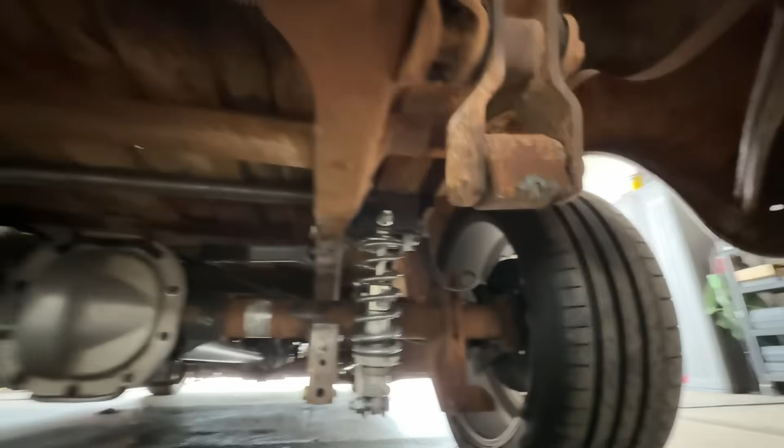Yeah, this thing's sweet. I had to mess with the fuel a bunch yesterday, with the base temp, just to get it on the trailer, because it wanted to lean out a bunch. It's running a lot better now. Needs a little fuel in her.

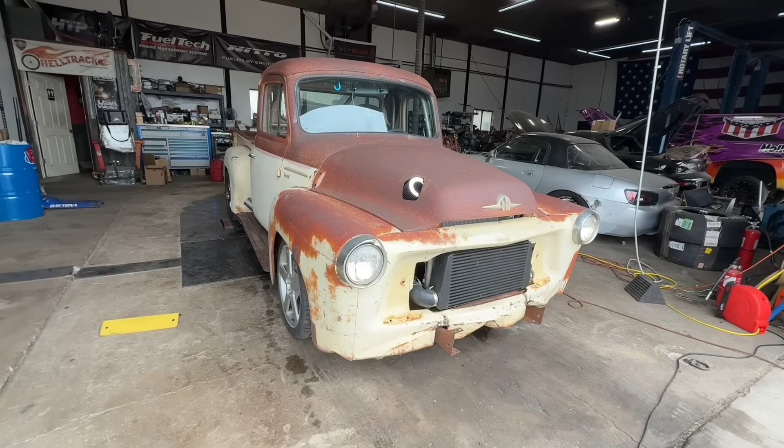That is sick. Still a little bit of work to do, but you're getting close. Yeah, it's just down to the handful of last things on the cardboard list.

Yeah, this is cool. What chassis is it on? Stock, original frame. Really? It's a Crown Vic front subframe and rear 8.8 with a Ridetech 4-link and coilovers.

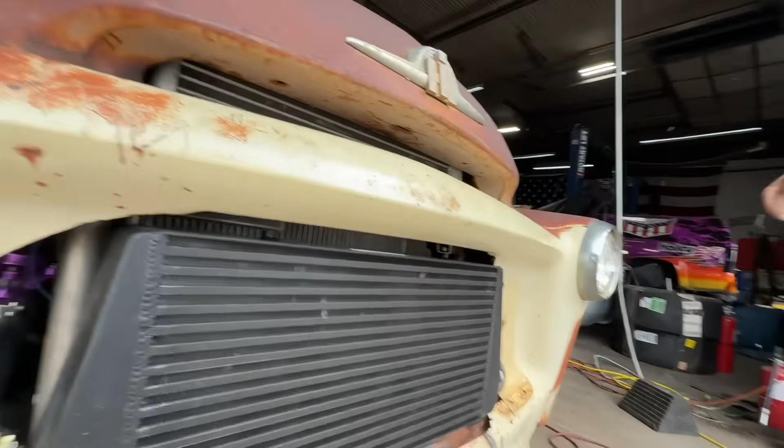It's got- I bought an F100 Performance Crown Vic swap coilover set just to get close. But I think I'm going to be oversprung, because the F100 should be heavier than this, since it has the iron block Ford engines in mind, and this is obviously aluminum, and these Volvo engines are pretty light.

I K-swapped a Crown Vic and I was a little oversprung, but man, it was so darty. It was so fun. Yeah, it was fun.

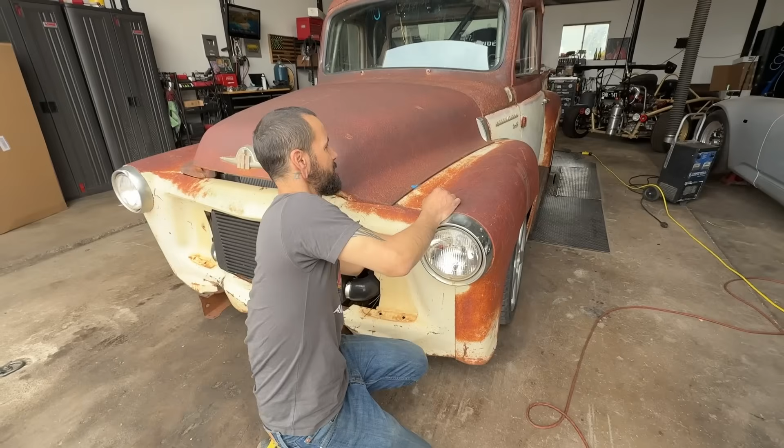I can get the hood off of it. It's got the cool International double-sided hood pivot, so it opens on both sides, or just comes right off. Yeah, we just set it to the side here.

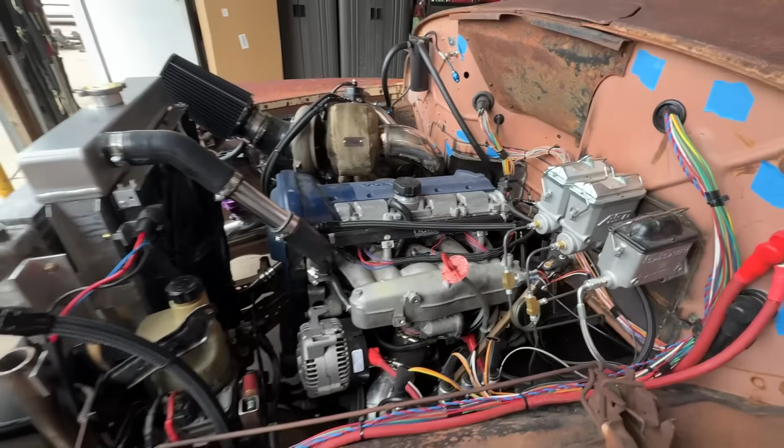This is sick. Dang, this looks fun. I hope it is. It should be, it turned out cool. So I'm shooting for 400 horsepower. Woo!

for the race. And then I don't know if we can save that tune and then turn it up, and save another one for me to put in after the race that's got more.

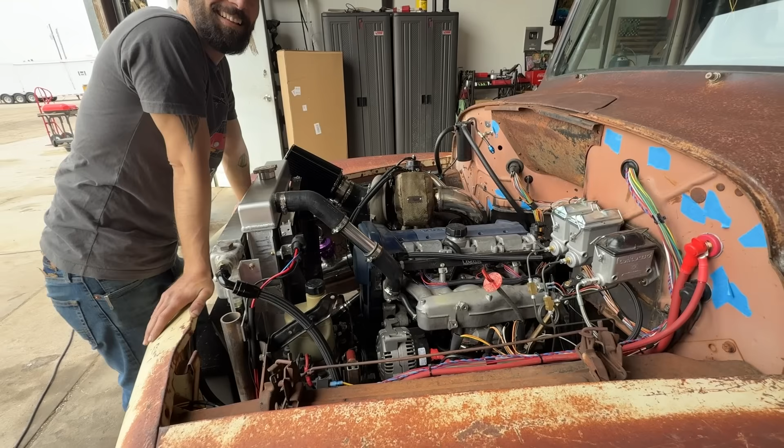That would be great. What fuel's it on? 91. I don't know how much we're gonna get out of it before it gets stupid. Yeah, it's just the knocking part, you gotta really be careful.

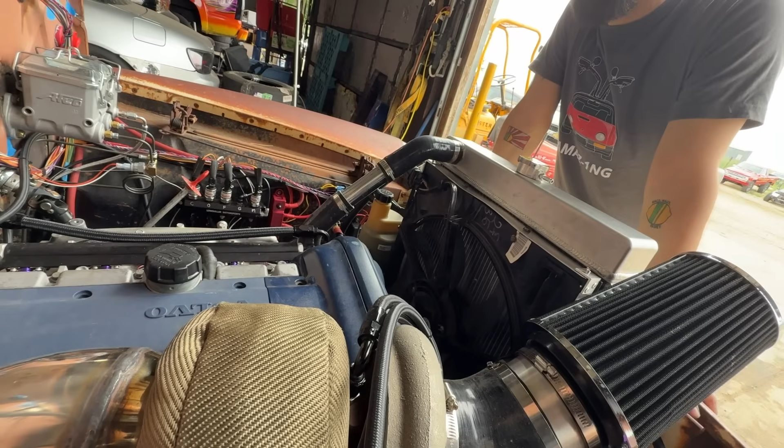Is the motor stock or? Well, no, it's forged bottom end, forged pistons, forged rods. It's got the water jackets all pinned. Okay, that'll help. Shimmed, so it should last.

A guy in the UK did the same setup with a 2.3 and got 980 out of it, and it was totally fine for like drag race, all-wheel drive launches and stuff. Yeah, and it's really just fuel dependent.

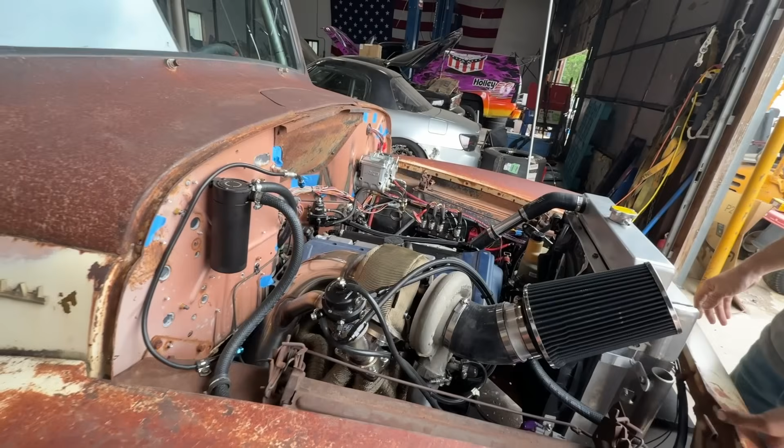You can't keep them from knocking with the 91, obviously, but I didn't want to deal with the E85 because getting it is a pain. If I want to drive this all around, I want to be able to do road trips and stuff. So someday I might put a flex sensor in it and be able to do E85, but for now.

E85 would definitely be the benefit for the high powered stuff. And everything in the fuel system is ethanol safe, so it should be able to handle it.

I think I'll probably eventually get like an aux CAN module to take those in and have more inputs. Well, for the road race stuff, oil temp would be nice. I can probably set it up for a gauge if you have to. You could always get your cool down lap stuff, it should be fine.

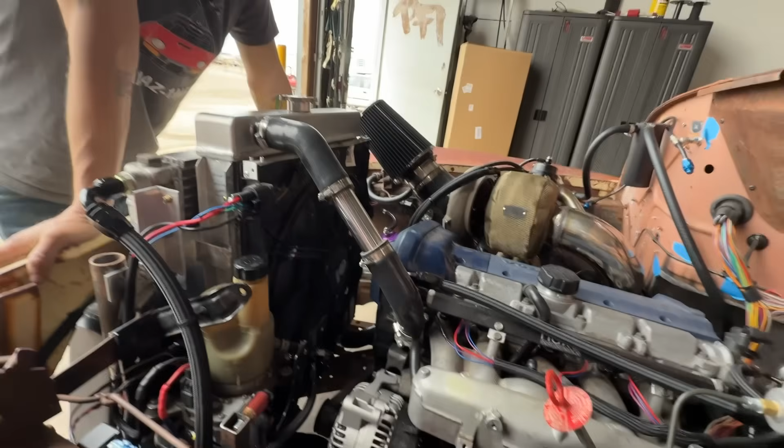And electric power steering- electric power steering, it's got a knob inside for control, that is sweet, so we can turn it down on the track. It's pretty heavy without the power steering at all, because obviously the rack is meant for power.

Right now the Haltech is turning this relay on, which is just giving 12 volts to the ignition side of the fan, and it goes full blast when it comes on, and for what you're doing, it's probably best, 'cause it's thinking the whole time. For street, I wouldn't mind having it controlled, but for now, this is how it is. I have this same fan on my 1UZ swapped Hilux, and it works great.

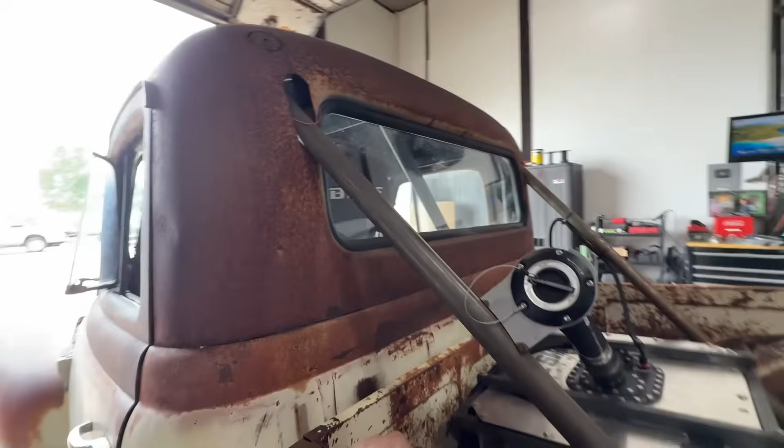Such a cool truck too. Just find it in a field or something? Basically, I found it on Marketplace, and it was in Texas in a field for like 40 years. The guy was one of those dudes that cuts up trucks and makes furniture and garage art out of them, and he said this one's just too straight, so he was going to sell it. I got the whole truck for $1,200 delivered. He brought it up here for that. I was like, yeah, I'm buying it. There's no way I'm not buying an old American truck for $1,200.

And then it was all stock. It had the original engine in it. It didn't run, it had been open, and it had some giant 3/4 ton tow truck axle in the back of it.

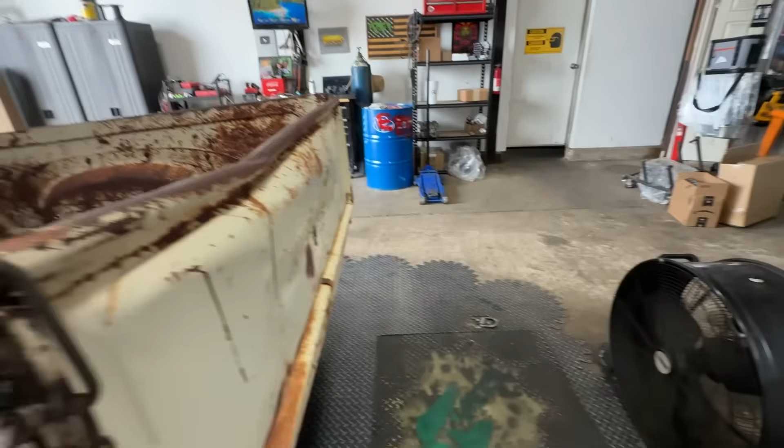What'd you go with for the axle? It's an 8.8, it's welded. Yeah, I noticed in the dirt. So I have another axle now - I got one that has a limited slip in it, but I don't know what kind yet. Eventually that'll get swapped in. For now, the welded diff works just fine.

This is gonna be so fun. Yeah, I can't wait, especially with the Crown Vic - good front suspension. This'll do great. There's Crown Vics that race Lemons and they do well, so that's kind of why I went with it. That, and it's such an easy swap, and it's aluminum, it's lightweight. You get motor mounts built into it - it's got 350Z rubber, like actual mounts.

Good front brakes too. For the Volvo, I took those off the S60R, modified the front knuckles to fit the S60R calipers, and they're 2015 Explorer rotors.

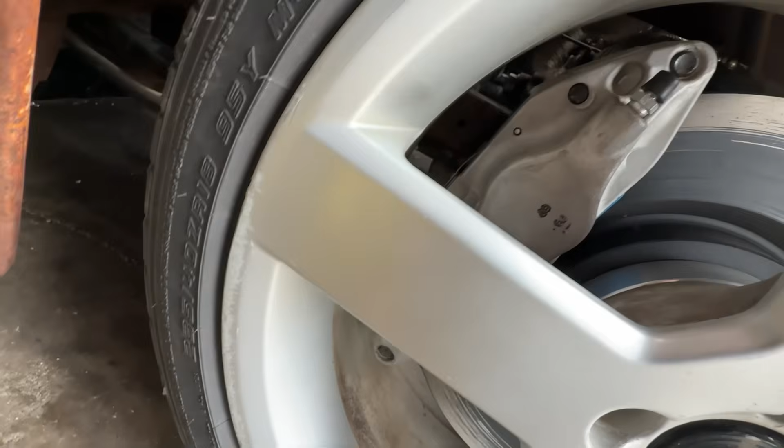Just a hodgepodge of cool. Yeah, it's a mess - perfect. That's what I'm after. Still some heat shielding too - I'm gonna put some heat shielding around back here so that this doesn't get too hot.

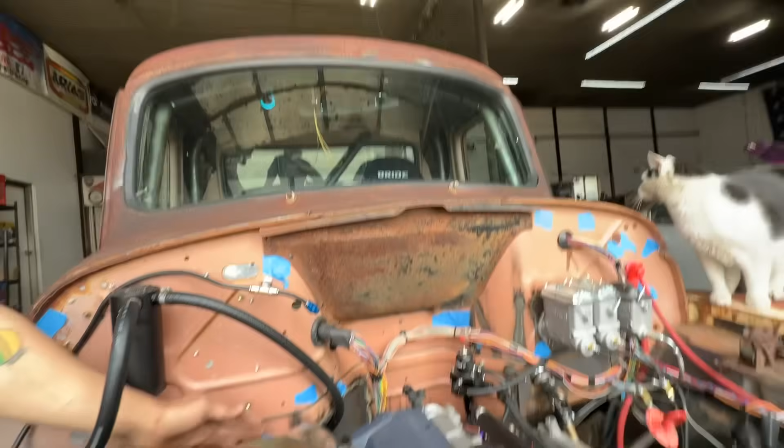Oh, little one's bad at timing, check you out, but what a cool cat. What do you think, is this a good one? Yeah, you like it huh? It's an awesome cat, yeah she's pretty cool. She's a car girl for sure, she's trying to figure out how to get in.

The breather - is this to the ground or is this like to a catch can? It's to the factory flame trap, so the stock breather system is all hooked up. Then the part that normally goes to the air filter goes to a catch can and then to the actual air filter. So that's just your little oil separator. Yeah basically - the stock one is there, and then this one's extra because I know they still suck a bunch of oil through. I didn't want to get rid of the breather and just have vents blowing oil fumes everywhere, but I wanted to make sure minimal oil gets into the intake system.

Cams or anything? Stock, stock everything else, stock valve train. I was gonna do valve springs, and then a bunch of people were like, 'No, it'll rattle itself apart before you rev that high anyway.' And like an idiot I just said, yeah fine, alright, I can do valve springs later if I need to.

What do they rev to? So 65 is the stock redline. The sleeves were the biggest problem with the R engines, and I only found that out after I decided to go with an R engine. That's why I pinned everything, so it's got the best chance it's gonna have of surviving.

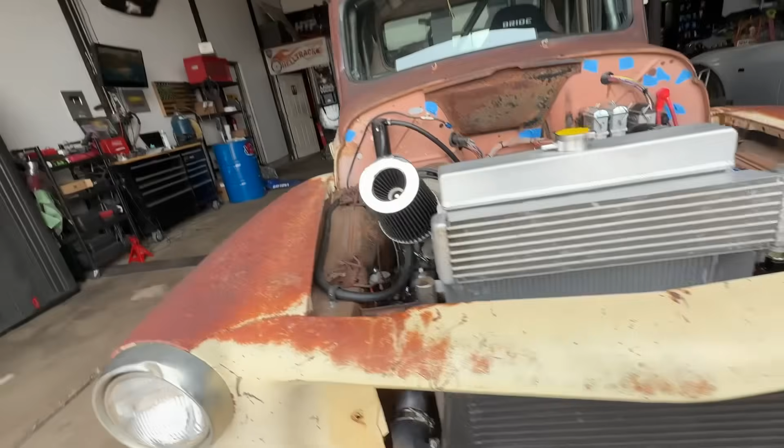No wonder you got hooked up with Hank, the Volvo guys. Lemons in general is how I met Hank, and he was pretty excited when he saw me build this. I bet, especially with the Volvo. Yeah, his car is cool as hell too.

This thing has been really fun to see it finally come together. After I've owned it for 6 years, I finally started working on it 2 years ago, and it's just been nonstop. I get to go see Hank tonight.

Go help him with that air shifter on the Radical. Yeah, that thing's been a hell of a project. He's pulling his hair out. I just hope it holds together, man. I just want it to stay in one piece long enough to do this race I've been trying to get to for 2 years.

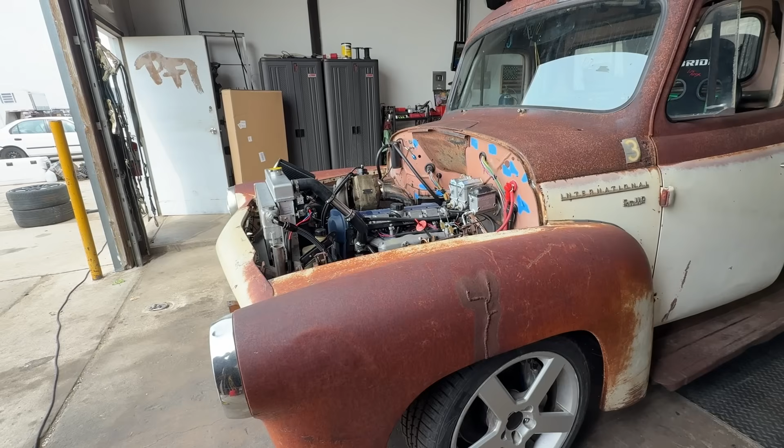Does it have anything for knock sensor wise? It has the stock knock sensors, and they're wired in. Bosch or what? I believe they're Bosch, but I'm not 100%. Hopefully the Bosch are the good ones.

Think so, huh? She's ornery.

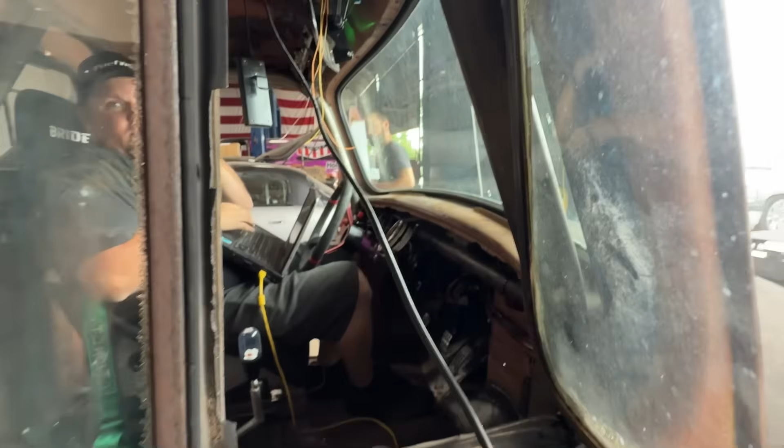It is awesome. She a little rich? No? It was just kind of black, sooty. No, it actually wanted a touch of fuel. I didn't record it, I was just kind of driving.

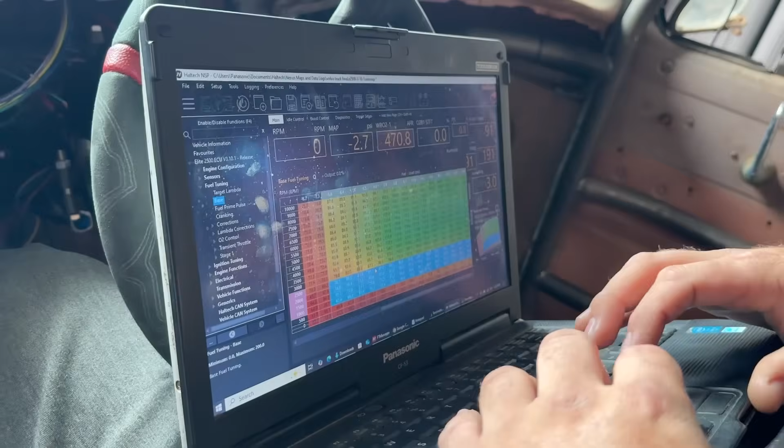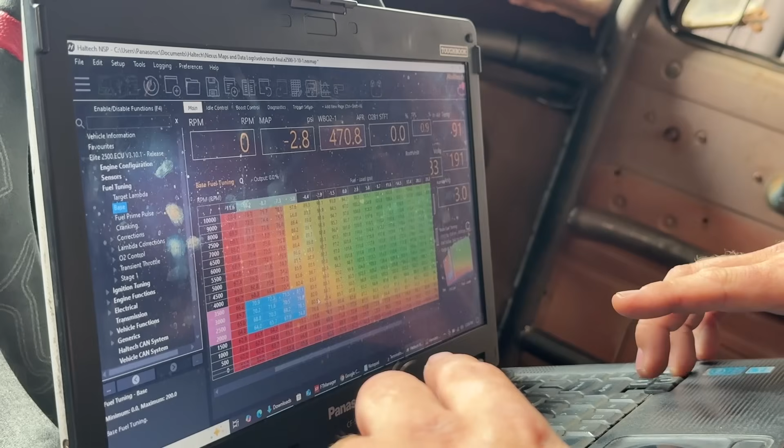If you want to come over here real quick - they had the scaling wrong on the map sensor, so it was fighting itself all over the place. It wasn't actually really using the map sensor. That completely explains a lot of how it was running. His VE numbers were like 20 down here to get it to run, so basically I just had to build everything up after getting the map sensor right.

So I was just kind of driving to see where everything was. It's not too far off right now. Probably make a pull here real quick. Let's make a rip.

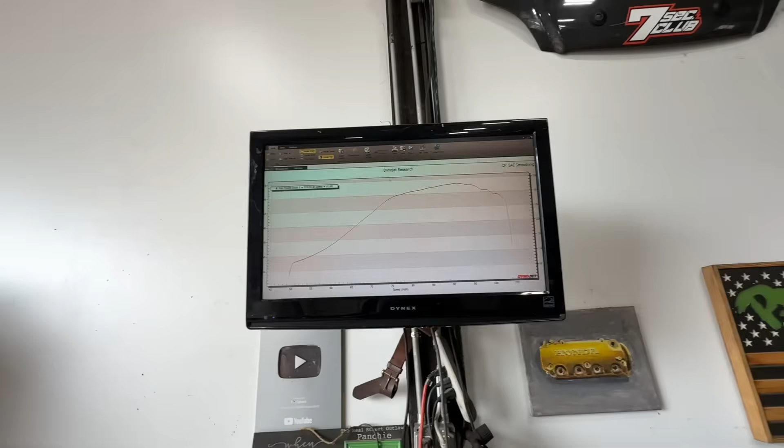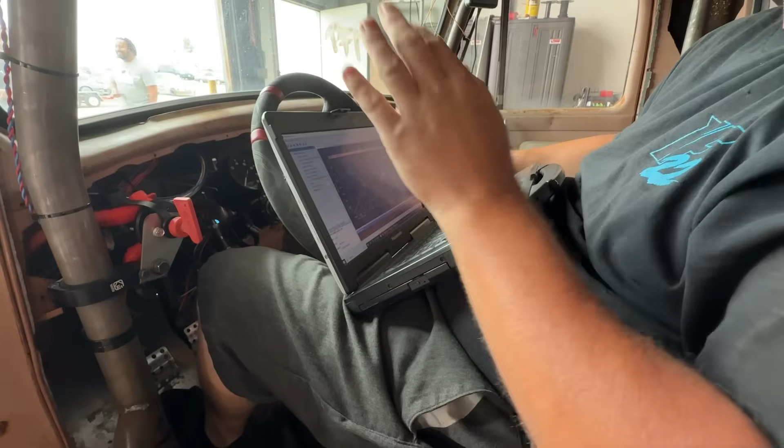Not a bad place to start. 333 on the first pull - man, that's already better than stock everything. Triple threes. I don't think the engine wanted to release off of the trans when I pushed the clutch, I kind of had to pull it off. Had some mass. How much boost?

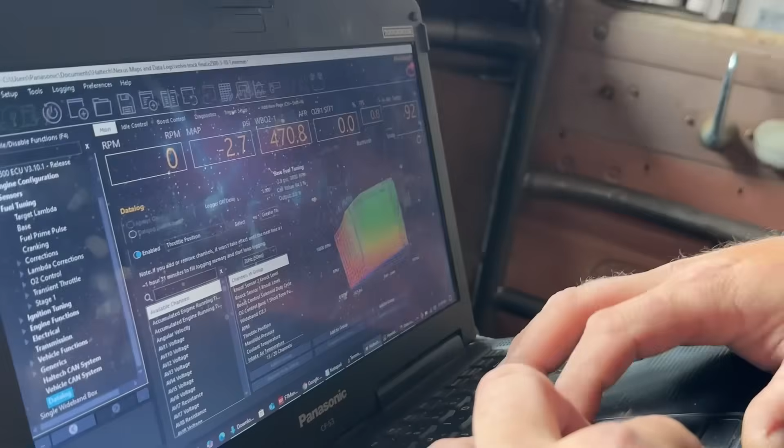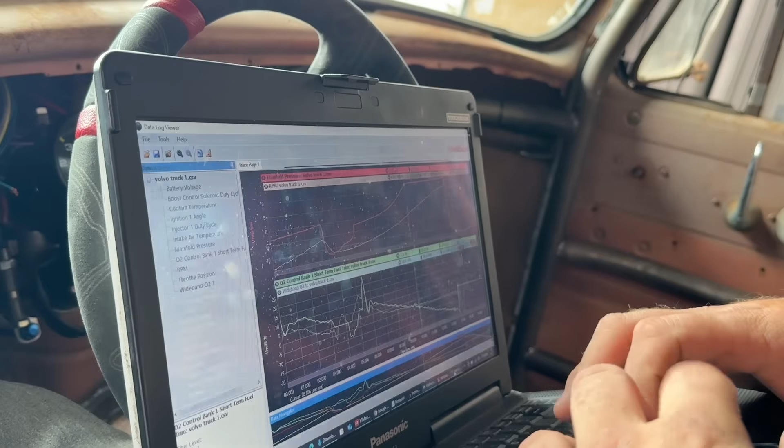14 pounds at the end, and it was kind of rich. The short terms were pulling a bunch up there. Yeah, we ended up pulling 16%. I saw that, it was pretty good, but if you look at my map here, I kind of just built the back up real high because I didn't know what it was gonna do, and the map was so wrong. So I just built that up, so it was kind of rich up top.

How much ignition's in it? That's what I'm pulling up right now. Went down to 11 and it came up to 14. Pretty dang close, huh? Yeah. The other stuff I need to add into the logger is the cam control, because I need to see what - I think it goes way faster than you thought it would.

All right, what changes did we make there, James? A bunch of fuel stuff and added a bunch of stuff in the logger. Nice.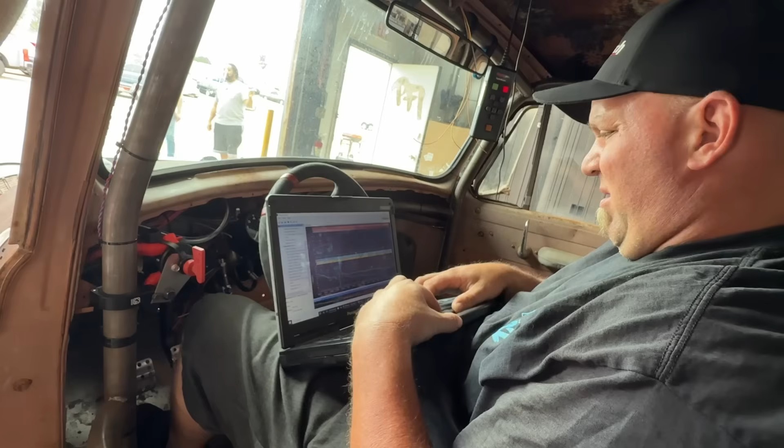321, kind of fell off pretty hard in the back. Yeah, I didn't even pull it all the way because it felt like that. See how flat my air fuel was that time too? Yeah, ooh, okay.

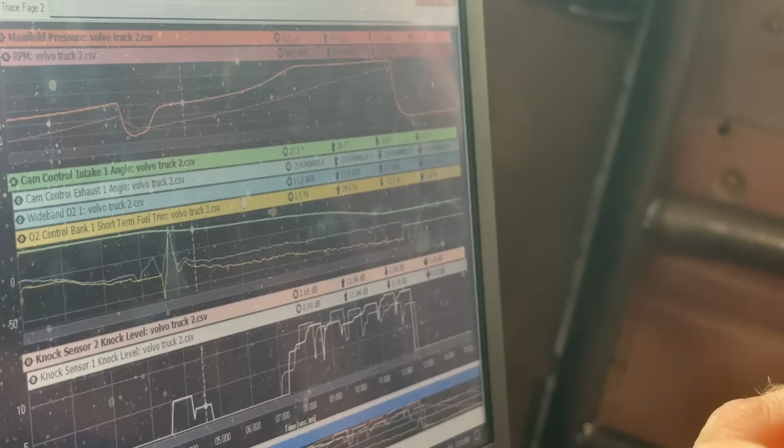So our intake angle is working, see, it's coming down. So see, it's coming down, but look at our exhaust.

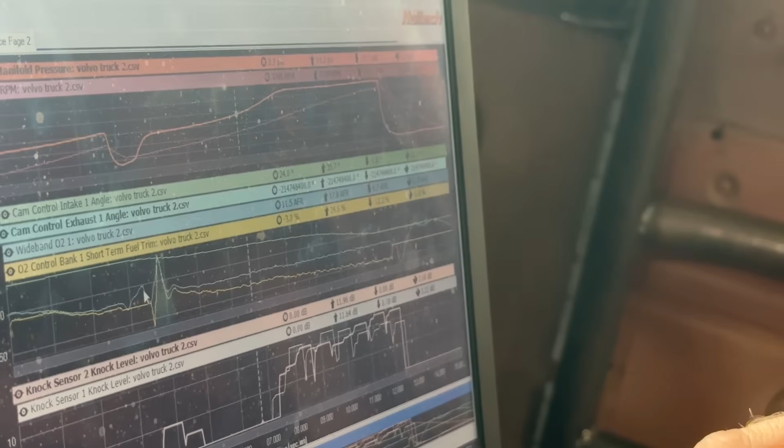Negative 214 million something degrees - off the charts. So the exhaust one, let's look at that actually. Cam control. Let's look at wiring - so exhaust cam input is SPI 3, output is this.

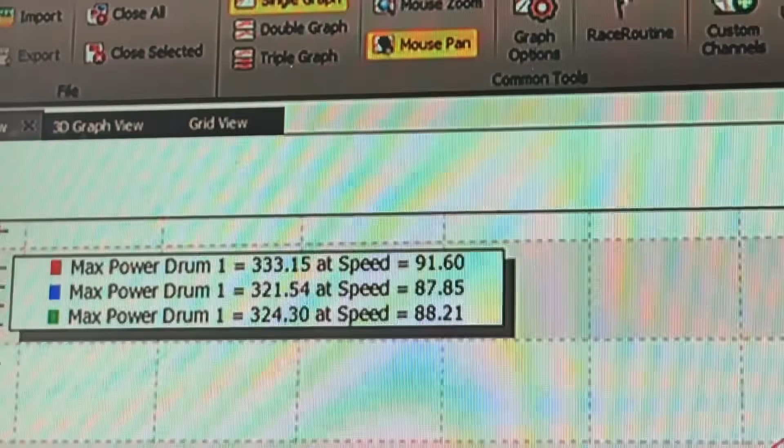Get back, he's messing with the exhaust cam angles, trying to find that, but definitely a little better. 324 was closer to what it was doing the first time, and I didn't change anything, besides turning off that cam sensor.

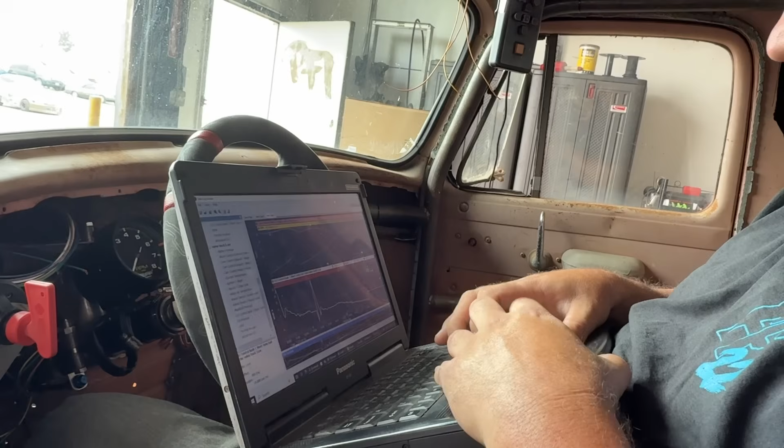You see where it starts losing it is where the intake cam has everything pulled out. Yeah, because once you find this and add a touch of boost, see what she'll do. I pulled that one to 59 is where it had already fell out, it's already rolled over. So you're doing a hole and seeing where it sprays from.

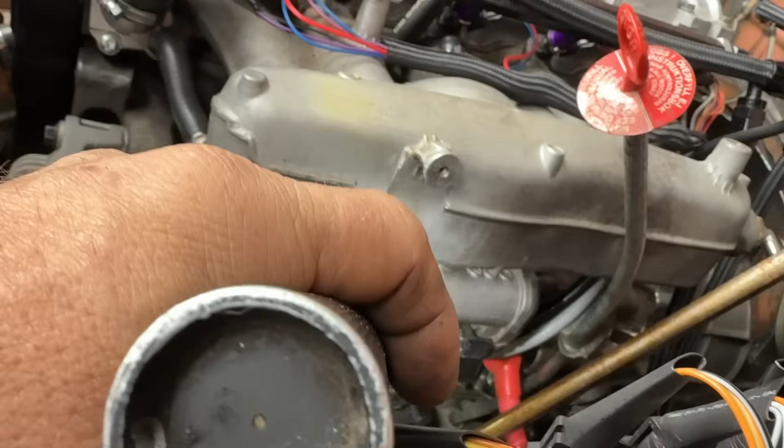What do we got cooking? He's got a little bit of an oil breather puddle under there, making oil go everywhere, and I can't tell where it's coming from. It's mostly saturated, coming out of the valve cover into this breather box, which is also fed by a giant port in the side of the block.

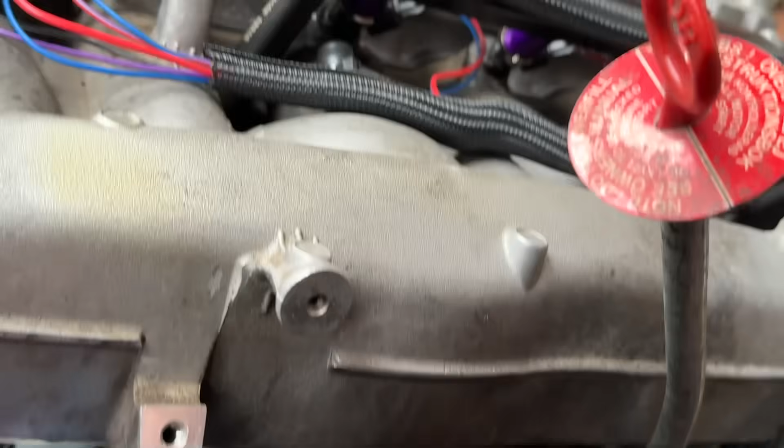On the back side, where does it vent to? It vents to that catch can, and into here, but there's also a vacuum fitting right here. The one hose is pretty dry rotted - which is bizarre because it's brand new. Yeah, you see how dry rotted it is? Yeah, I know, I'm a little frustrated by that.

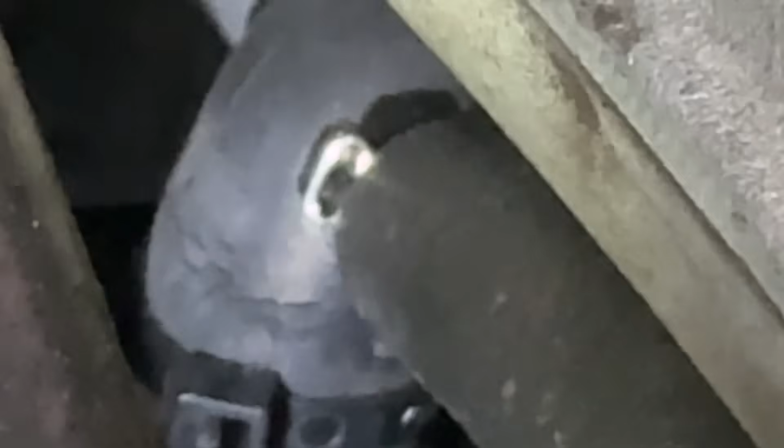Most of the oil seems to be on the back, where the big port is on the side of the crankcase - it feeds into the side of that box. But I felt around it and it doesn't seem like there's any holes in it, and it didn't come off, so I'm not really sure. Whatever it is, it's spraying.

Let me grab a GoPro and I'll put it down there so we can watch it. Okay, that's actually a good idea. All right, so I got a camera on the venting, we're gonna take a look at that, and we're gonna make a rip, see how this thing will do.

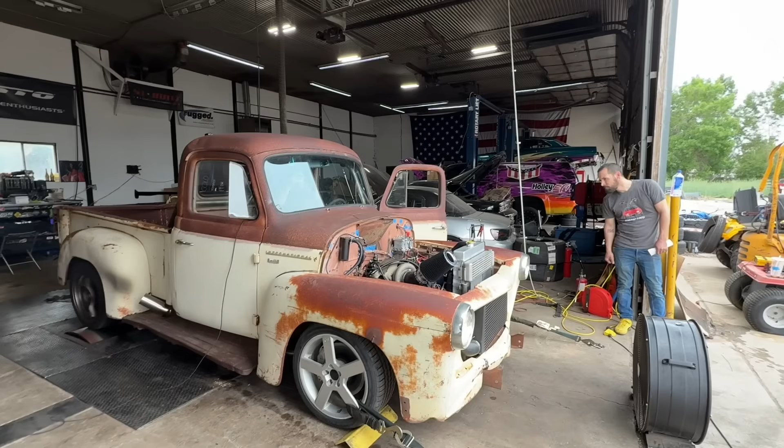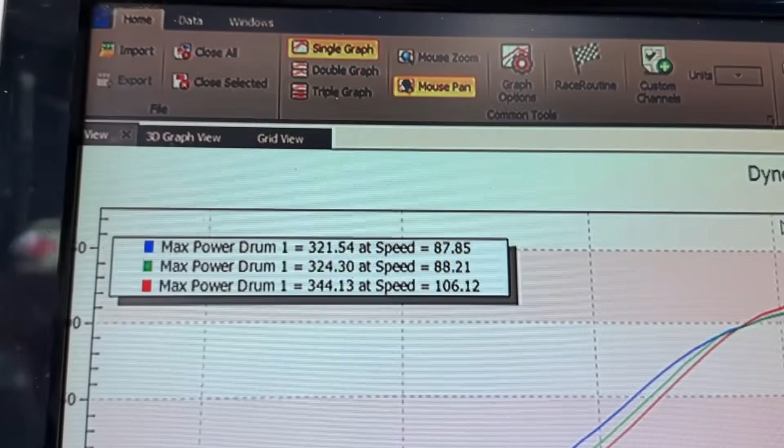A lot better. That, my friend, was much better. It felt great, felt way good. 344, and it carried a big flat power band now.

But it's like this weird molded elbow. What'd you change? Oh, that's the cam angle, the cam angle on the intake. So let me get this up and I'll show you. Throw your screen capture on real quick.

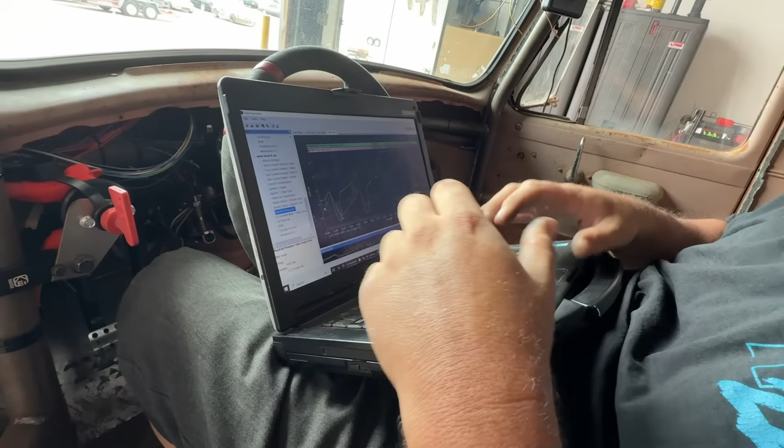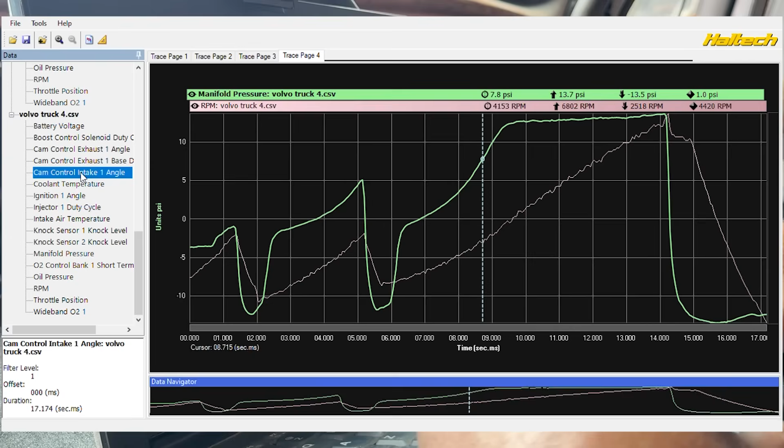Yeah, hopefully I can get it. Alright, so then what was that? Oh, cam angle, intake angle one. I almost see, I wonder we had 30 and then it came down to 25.

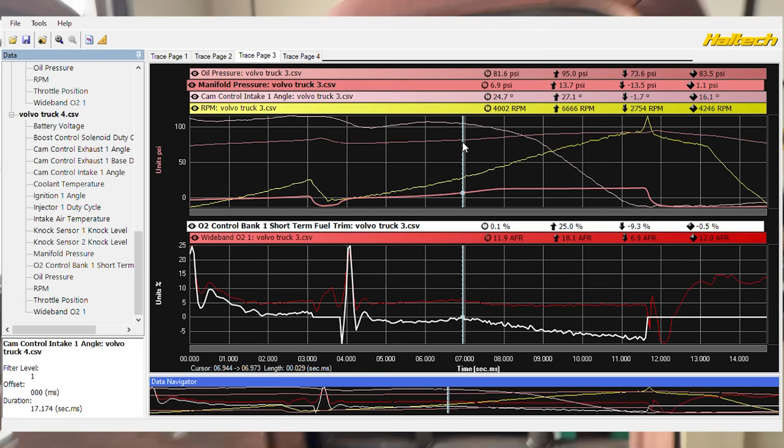Yeah, and it's so flat. I think you kind of nailed the angles here. Whereas before, if you look at this one, we kind of started the pull at 24 and came down to 0. Yeah, and I wasn't happy with that. No, it just needed to get down. Alright, let's check this out here.

Got a little oil on stuff. I saw where it was coming from. You did? Yeah. I don't know that there's much I can do about that right now. Where was it at? It's the thing on the block.

There's like a big rubber elbow that feeds the side of this flame trap, and when you hit boost, the whole thing just ballooned. Interesting, yeah, like there's way too much pressure. I don't know why, other than maybe pinching off or disconnecting the intake side of it and see if it stops doing that.

So it's getting boost, like it might be getting boost, yeah. It has to be to blow up. Right, because I can't imagine there's that much crankcase pressure, or everything would be leaking. Well, if it's a soft hose... it is fairly soft. Even a couple pounds of crank pressure could blow up a soft hose. I mean, it's about that big, and it's pretty thin.

I don't know if we just let it go for now or what. Probably for now, but before you race it, I would absolutely need to find something bigger to put on there, or get it venting really well, reinforce it or something.

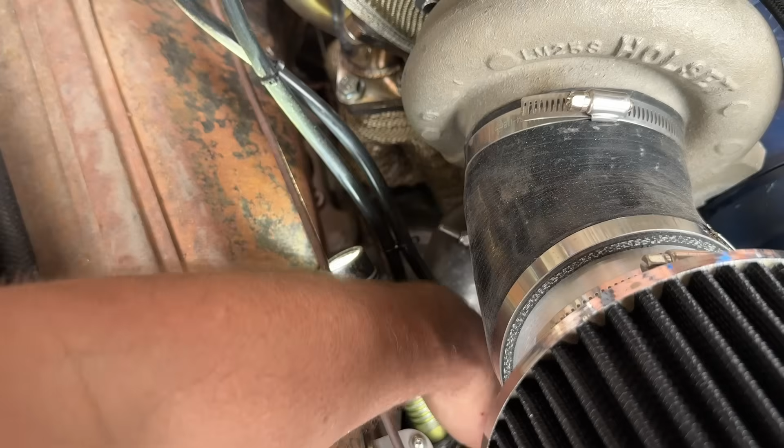And she's going. And it sounded like it was rocking. There's the off point. That limiter is not grabbing.

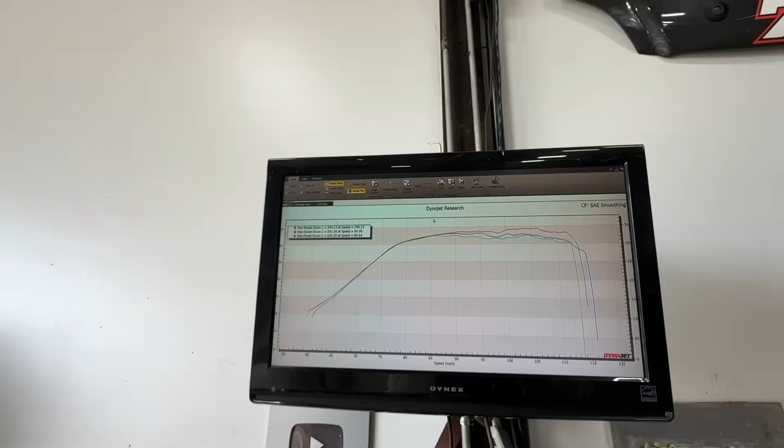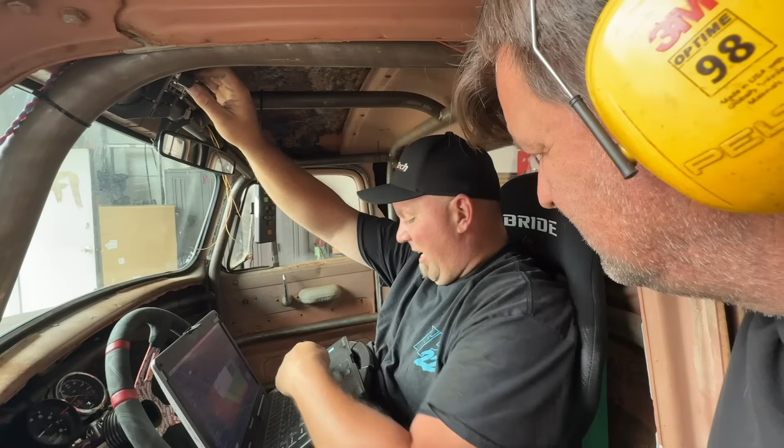325. 325 horsepower. It's just trying to get a good level. 325, just kind of hangs in those areas. Yeah, I'm not changing anything on the fuel.

And the rev limiter did not get me. Yeah, I heard nothing. So you're having some rev limiter issues. Yeah, it's not... not rev limiter. So we built a timing wall.

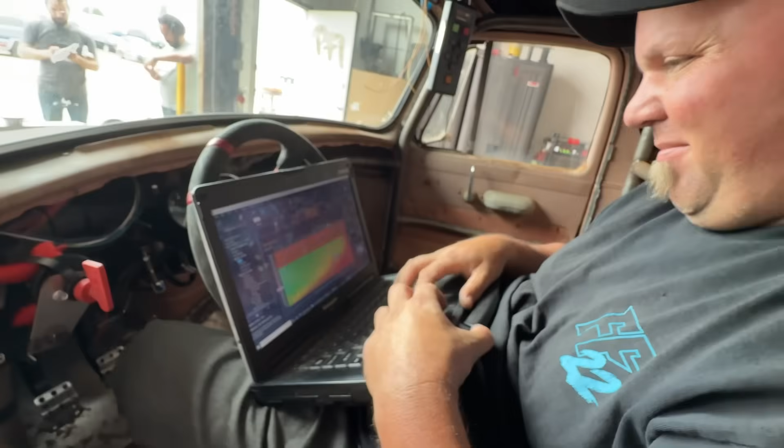So he'll feel that, yeah, and he'll know that that's it. Because otherwise, how do you know? Only reason I know is because I'm sitting here watching a number. Right, and that's the only thing I'm having to watch, a couple numbers. I'm not driving, this thing's stationary. But hitting a lot of negative timing, you'll feel the engine dip, and it'll be like, oh, it's time to shift.

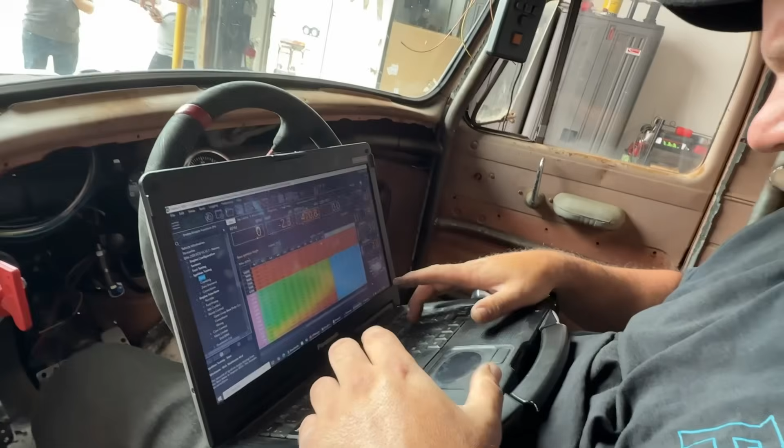So yeah, it's definitely a way to do it when things aren't cooperating. We're not sure exactly why yet, but we're into it. But we had to add some kind of safety to it, so that's what we came up with. See how it works out.

Any luck with the cam stuff? That's what he's still messing with. That's what we're doing, so he's trying to find that before you go much further, because you've got to have that right first. Yeah, for sure. I knew that was going to add a level of bother to it, but the exhaust one isn't working, right, but the intake one, that's what's totally manipulating the graph right now.

And it's giving it a nice flat power band, so it's really just... when is it hitting full boost so far? Let me look. I mean, it comes straight up. That's what I'm wondering. It actually does really well. Boost, so 4,400. Oh okay, so that's about it.

So what it starts spooling like, I'm flooring it at 3,400, and it goes directly to 0. By 3,500, it's above 0. By 3,700, it's at 3. And it's at 6 pounds by 4,000.

By 44, it's at 12 pounds. So it's a little bit slow. 45, that's about at what I'd expect, 13. Not too bad though. No, that thing will be wicked up. Yeah, it'll be running wicked up pretty good. The temp is kind of where what's changed some of the power here.

So because like the 344 was a solid 14 pounds. Some of these have been like in the 13s. Alright, so he's trying to get her worked out. These things can take a little time.

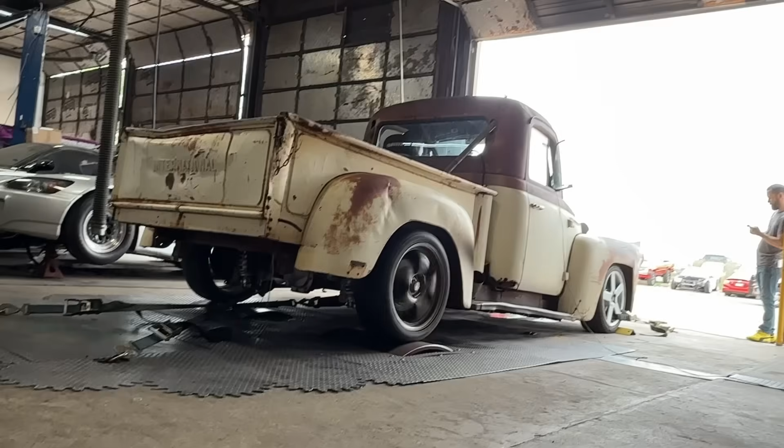We're at 22. It looked off and clicked a little earlier or something. Yeah, I just clicked a little earlier. Didn't feel any different. Nope.

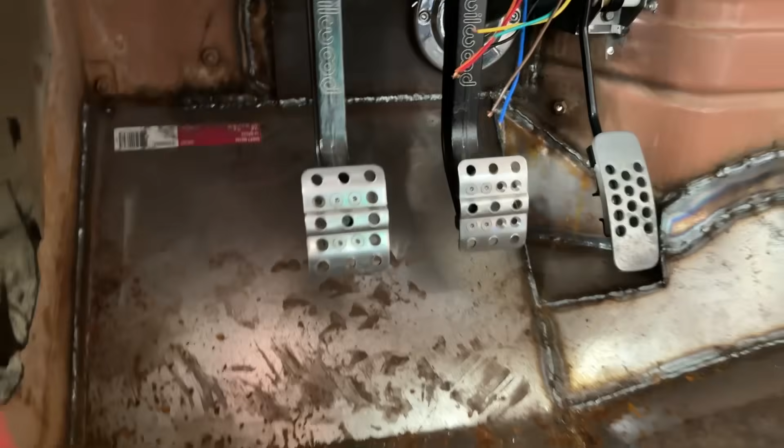Alright, so the clutch isn't releasing all the way. He's been fighting that. That's so heavy too.

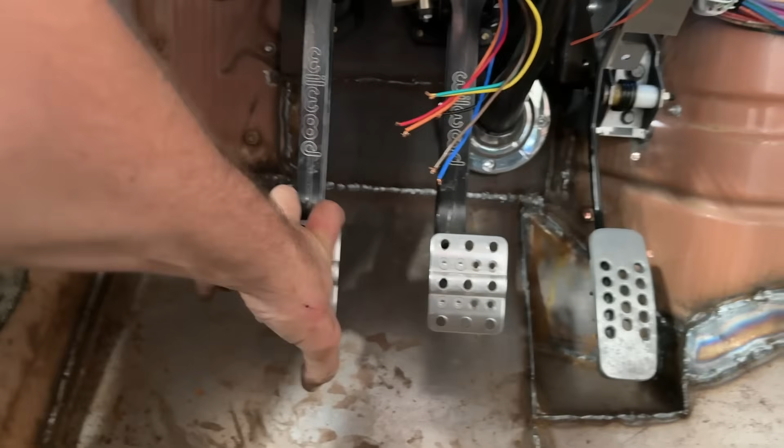So that's why it has that little bit of rev hang too. Which, as soon as it starts making more power, more RPM, that could get worse. So we just cooled her off, pulled her off, changed a little bit of cam angle, and gave it a touch of boost control. See how she'll act.

At 342, it just kept climbing boost but losing power. Yeah, I wonder. And the same power, it just says it must be something in that exhaust cam. That's what we're gonna need to find.

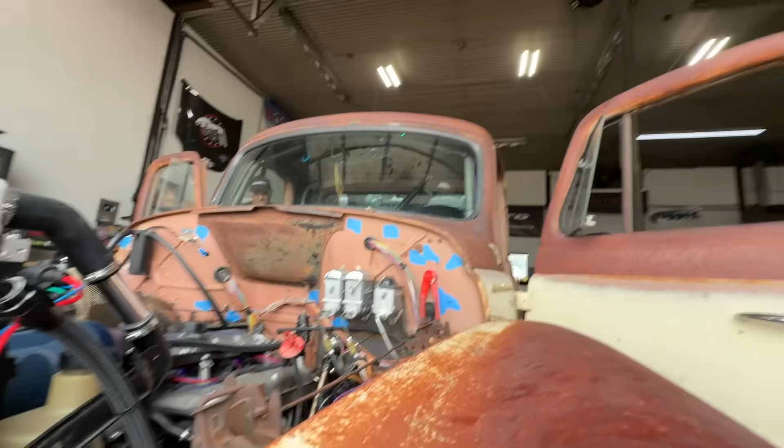That seems like you got a lot more oil now. So this pile was because the oil feed to the turbo was loose, which I tightened. This is all just breather.

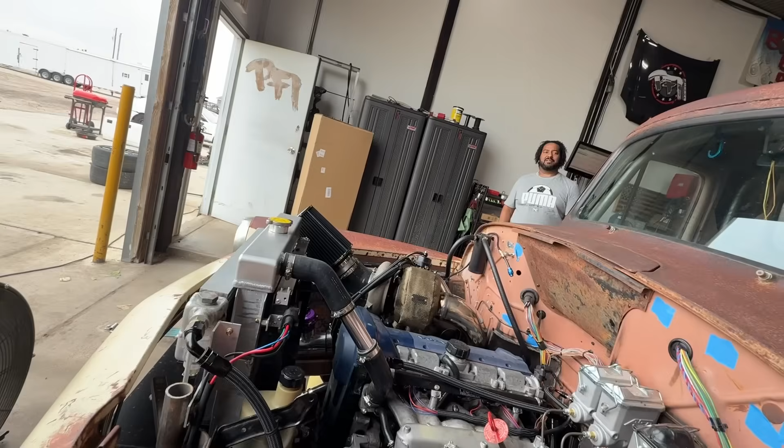He did find the solenoid though, so it is working. Yeah, it is working. And that was up in the air too, they're just finding what hertz rate and where it needed to come in.

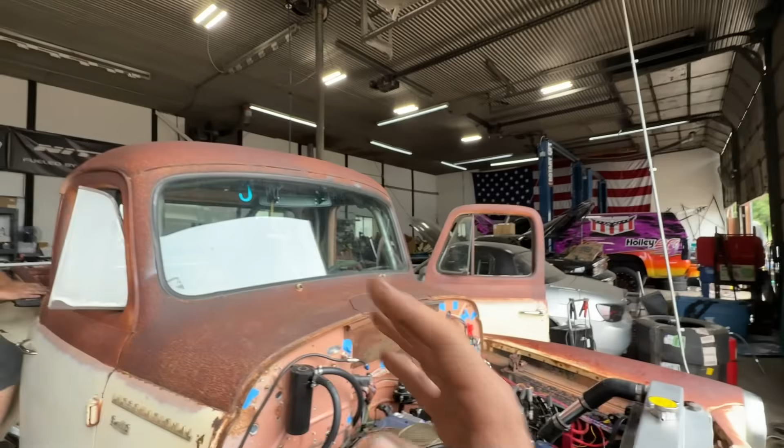So that took some bit, but you know, it'd make that power early, but if it's gonna make the same power, 13 pounds, it's a difference, it's just falling off anyway. It makes sense. So I'm not chasing peak numbers. No, I just want something that's gonna be better.

Take just another session and figure out that exhaust cam, because once you can get the air out of it, it should be able to make plenty of power. Exactly, seeing what it wants, yeah.

And then the whole rev hang thing too, because once the power starts going up, that's going to become more of an issue, because it's not going to let it go. And if other people are driving it, I don't want it to be a problem. Yeah, I'll work out and figure out the clutch travel and the breather system ASAP.

But that's what the dyno's good for, because this is all stuff you'd never find at the track. Exactly. And that's what makes it seem to us like it's that exhaust cam.

Yeah, it's just like we fix that on some of the fixed cams with degree, we move them. That's what you're doing, you're electronically degreeing it constantly as you're moving. So that one where it's sitting, because we can't move it, is efficient low, but it's not efficient up high.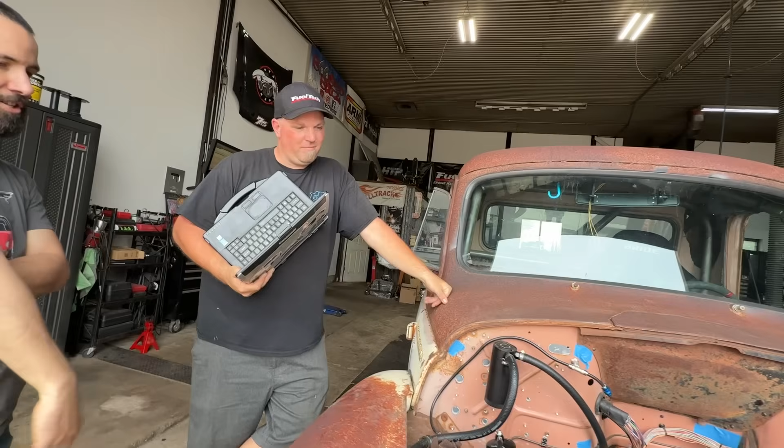That makes sense. But yeah, honestly, lower power on the track is not going to be a bad thing for anyone but my brain. Everyone's going to be happier that it has 80 less horsepower than I thought it would, because they're not going to be fighting with it as much, and that's going to be good for us because we're not going to be going off the track all the time.

So yeah, we'll figure it out, we'll just do a little research. My buddy was like, 'Keep it under 250 for the track.' I'm like, no, I'm happy with that.

I mean just seeing it make 330, 340 right out of the gate, that was awesome. Frick yeah, sick, that was cool. And that's more power than stock from this engine anyways. So yeah, I'm already ahead, but I need to solve those issues quick because that stuff is major for the racetrack.